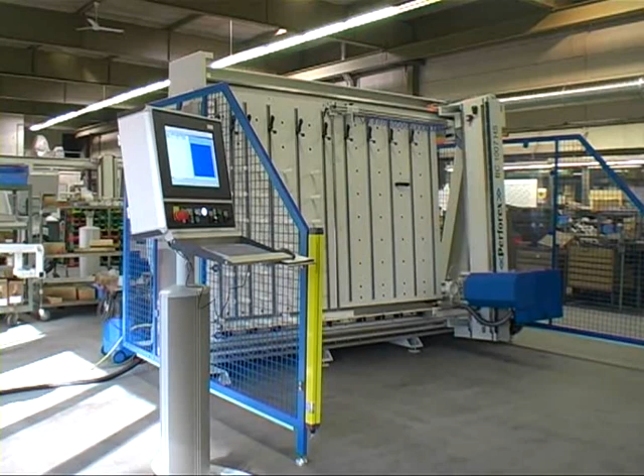Perforex is an up-to-date 4-axis machining center with computer numerical control, designed and manufactured for the purpose of machining control panels, cubicles and enclosures in the switch cupboard industry and assembly. Besides the simple and easy workshop programming, connections to almost all electrical CAD planning tools have been established on the machine.

No matter if you use our predefined libraries or your own raw panels, component or variable component parts, programming is much faster than taking measurements or making designs. Everything has only to be defined once and can be repeated as often as necessary.

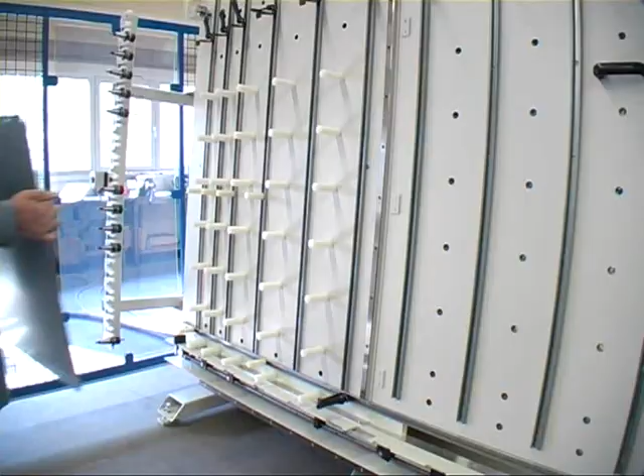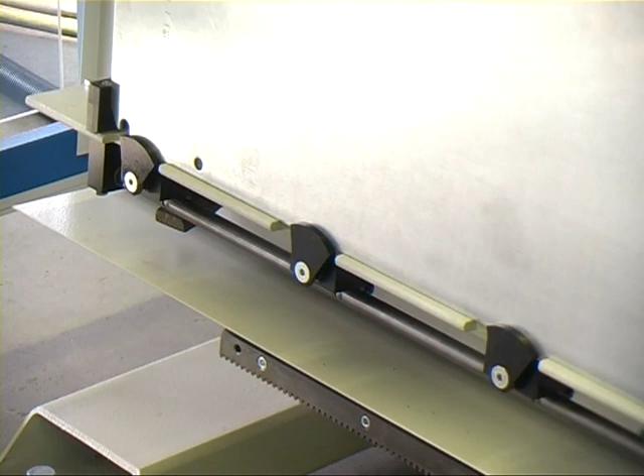Since the components to be machined are set on the machine from the front side, a setting up of the machine close to a wall or between other production sites will cause no problem at all. Once the panel is tightened, the machining can be started and completely finished without any further intervention.

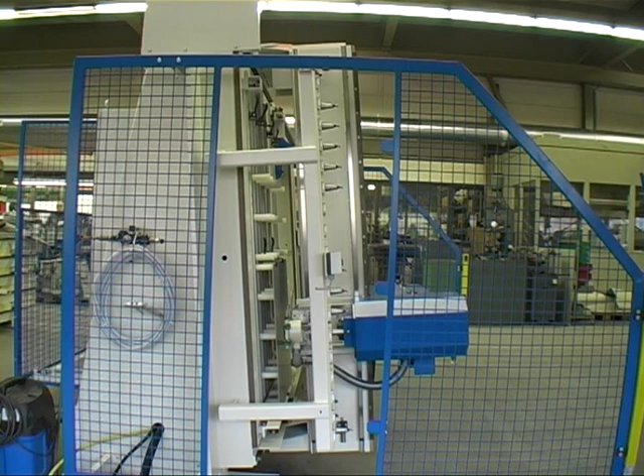Due to the vertical and slightly inclined work panel of the machining center, much less space is needed for the setting up than would be with horizontal work panels. The positioning of the workpieces can also be managed much more easily and in upright posture. The traveling bridge equipped with the corresponding tool slides over the workpiece, considerably reducing the working time for the job to be done.

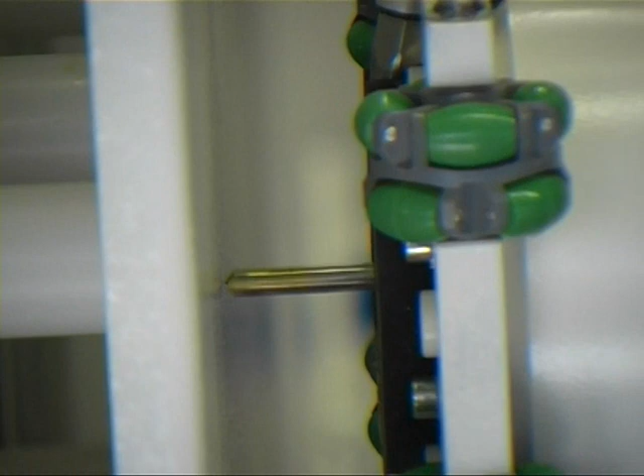The change of tools takes place automatically and each tool is checked before it returns to its place in the tool magazine. In the case of tool rupture, the machine will stop automatically and a warning will appear on the computer screen.

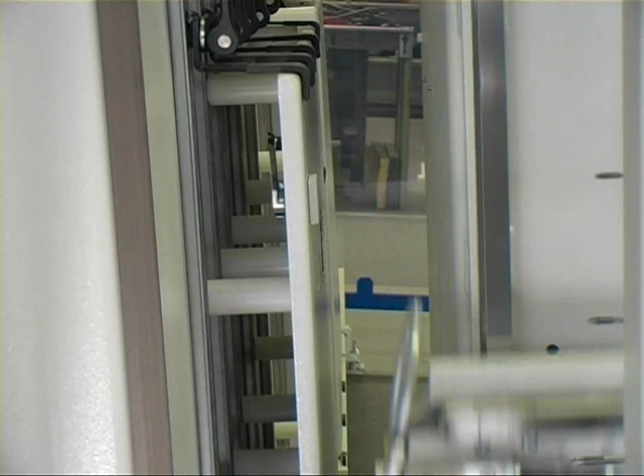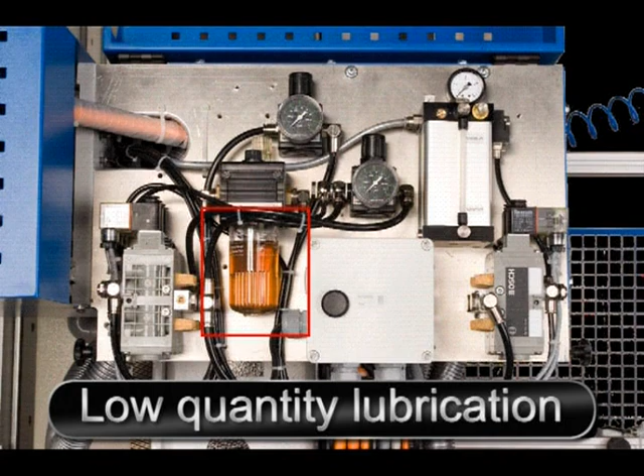The 5.5 kilowatt high capacity motor with maximum 18,000 revolutions per minute allows the machining of various materials, such as steel, stainless steel, aluminium, copper and even plastics. In spite of the high capacity, the motor works rather silently, just like the other axis motors. A low-quantity lubricating device provides lubrication and cooling for the tools. It works with a very fine oil spray mist right at the point where the machining is done.

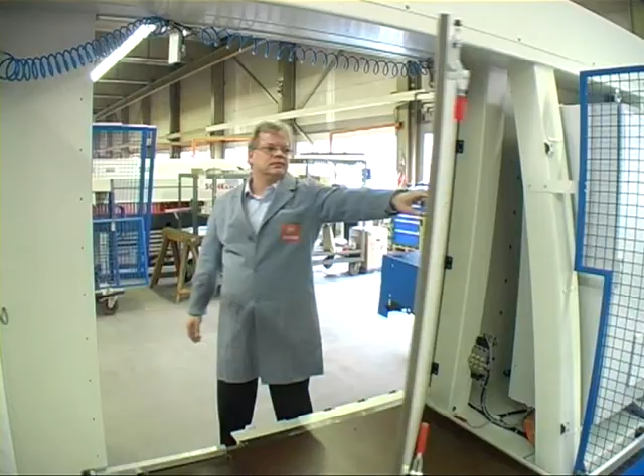The gate for the cubicle enclosure area can be easily opened from the front side. The Perforex machining centers are exclusively manufactured in Germany, and most of the components come from that country. A Perforex machining center is designed for long life performance.

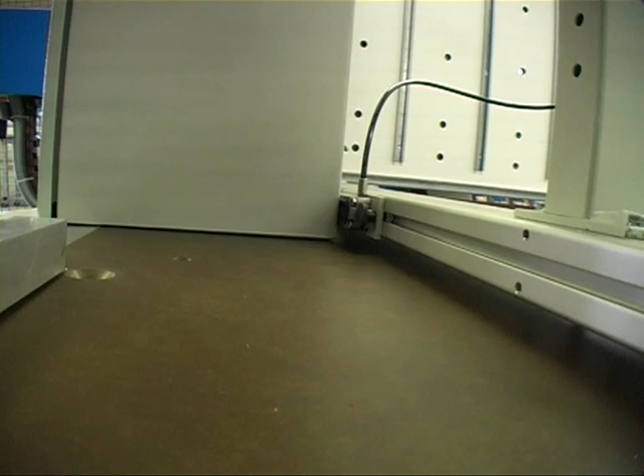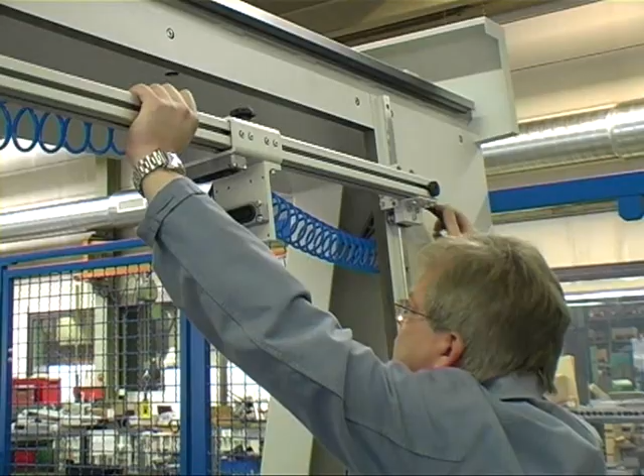Enclosures are placed into the gate and precisely put into the correct position with the help of the electromotorized depth adjustment. Then they are fixed with pneumatic clamps. Enclosures having a width up to 1200 mm allow the additional fixation of a panel at the same time.

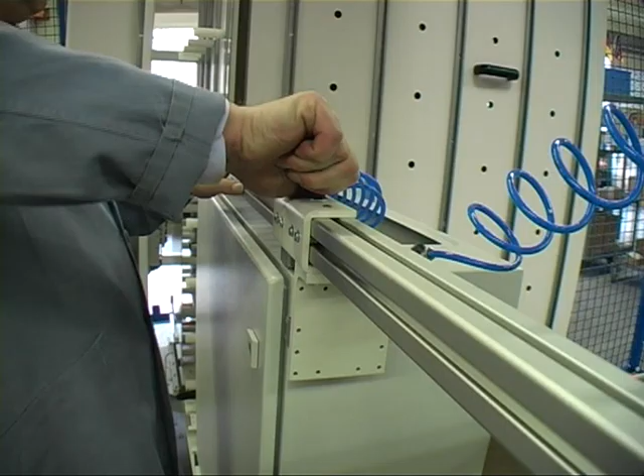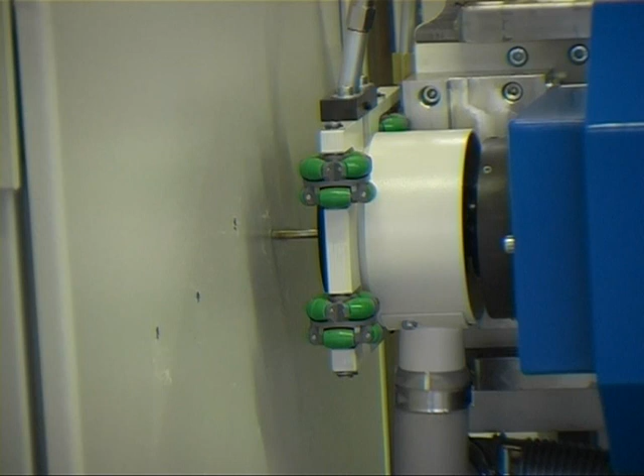Simultaneous machining of several cubicles can be carried out with the help of an additional multiple fastening device in the gate. This device allows the fixation of several small cubicles and their machining in one process. The use of customary trade tools and tool sockets makes it possible to optimize and to reduce production costs.

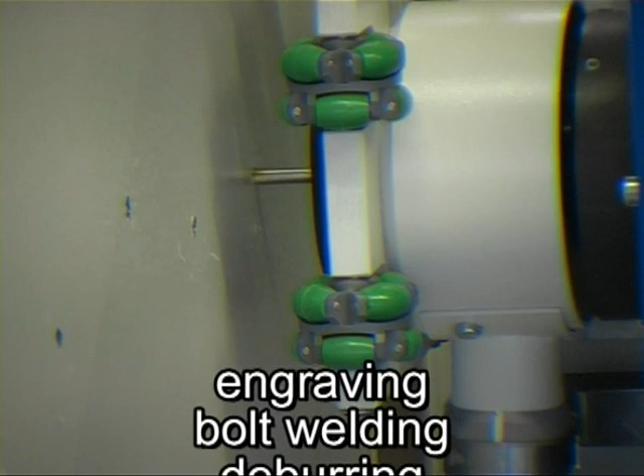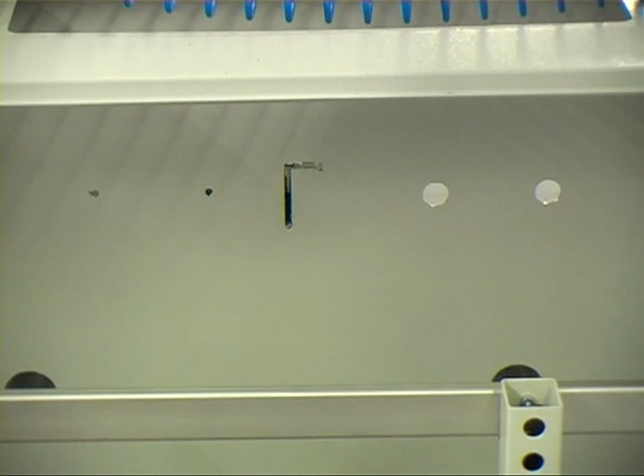Further machining processes such as engraving, bolt welding and deburring have been added to the original ones, like drilling, tapping and milling, allowing a complete spectrum in switch cupboard machining and assembly. Besides quality, flexibility and the large range of machining possibilities, cost efficiency and profitability are further topics which our customers benefit from when using the Perforex machining centers.

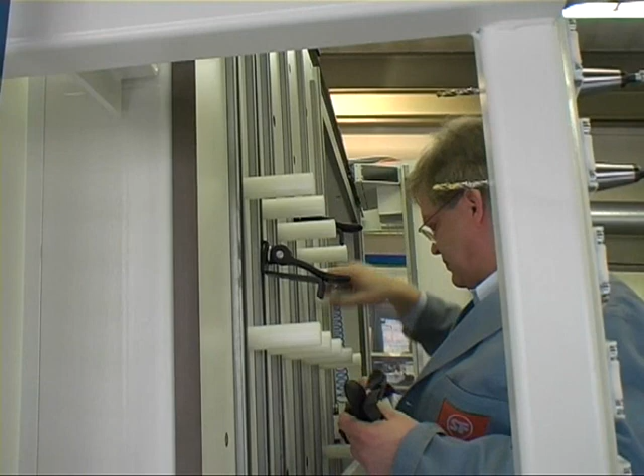The Perforex machining center is easy to handle, to maintain and to clean without the necessity of employing a special serviceman. Constant development on the machine has made it possible in the past and will continue to make it possible in the future to integrate further automated machining processes, optimizing at the same time the handling and the production processes.

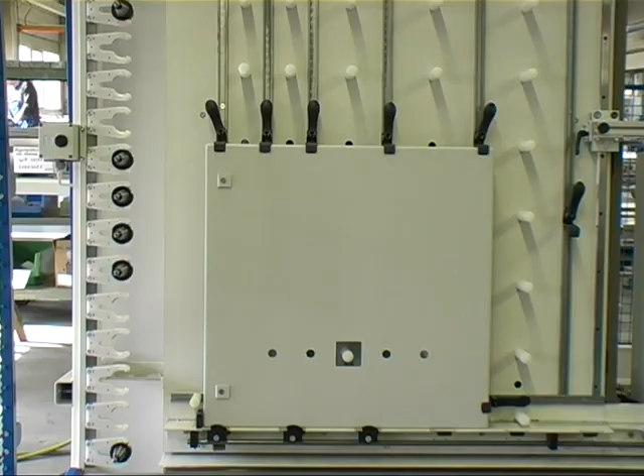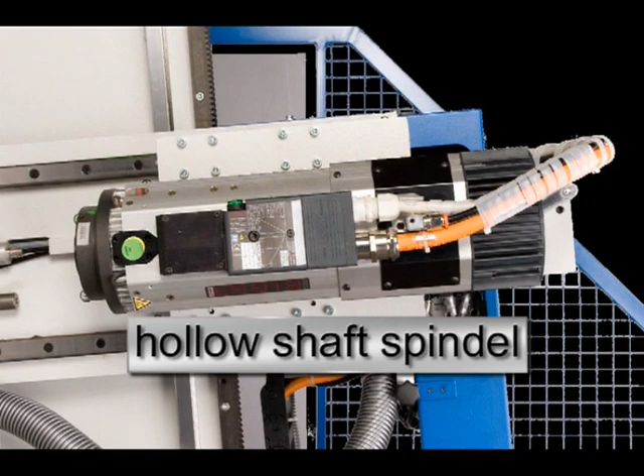Here are some details. The hollow shaft spindle right behind the drilling head, the enclosure, the patented pressure plate with integrated suction device for filings. Perforex machining centers are equipped with a 3-beam light barrier to prevent the machine being approached during operation.

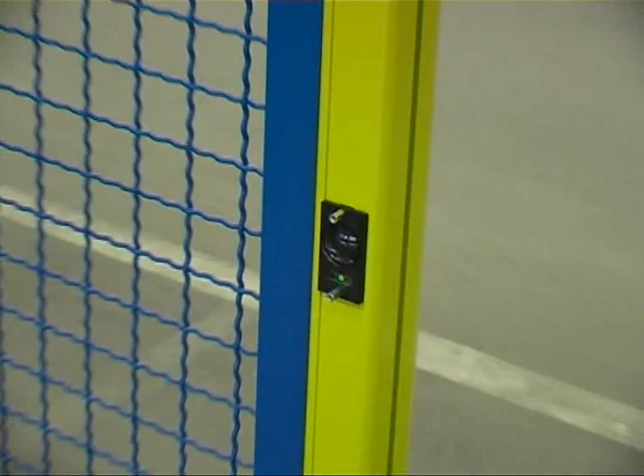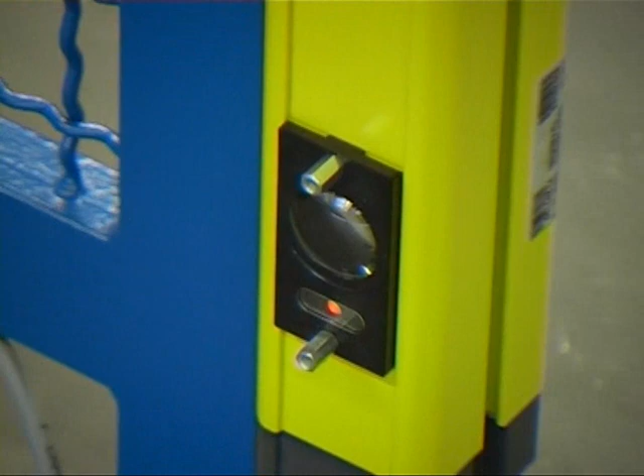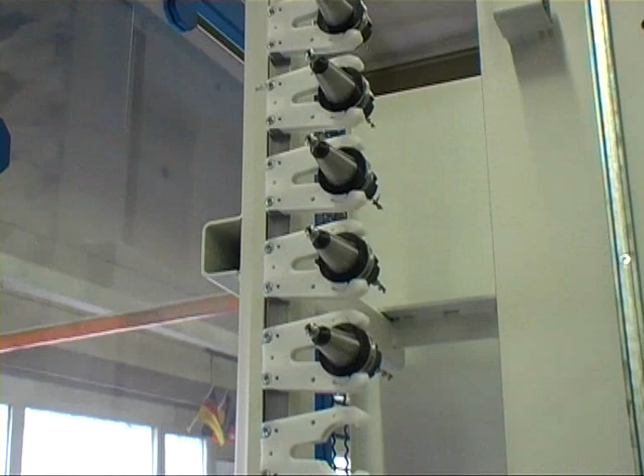The safety fences surround all working areas, even behind the machine. They are high enough so that even large persons cannot reach over them. The machining centers therefore correspond to all safety regulations established through the German MOT. Of course, the machining centers are in compliance with all applicable CE standards.

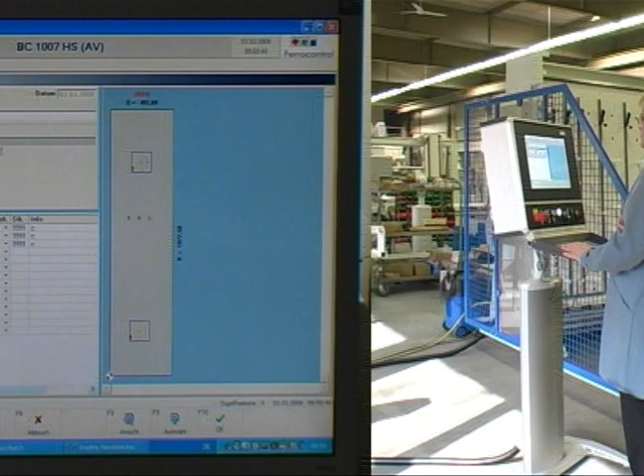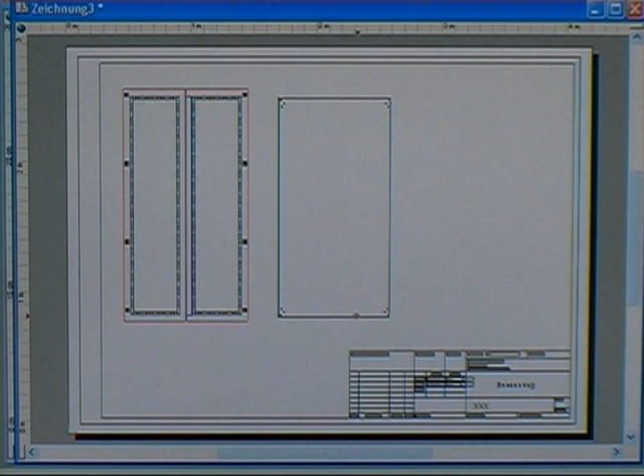One major aspect is and remains the workshop programming. This can be employed at any network-connected working site and uses a central data bank. The PC on the machine also has a network connection and uses the same data bank. With this, time-consuming import procedures have become void. No matter where the programming is done, the job order is on the machine and immediately ready for function.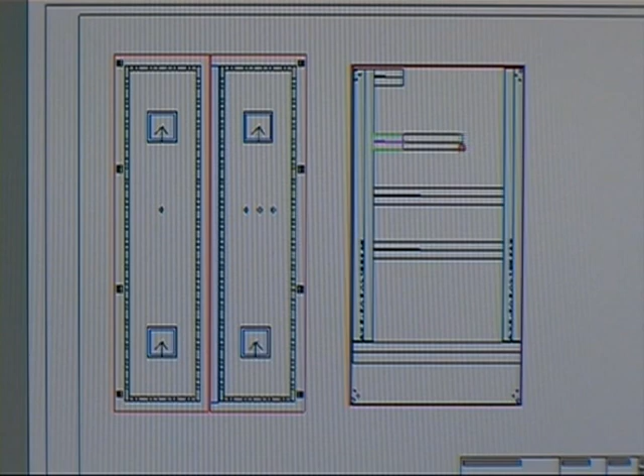You are already working with a CAD system? So much the better. In this case, you simply transmit the planning to our interface and the established bore pattern is immediately available for the next working order. We would be pleased to inform you whether your system is amongst these or not.

With the delivery of the first Perforex machining center in 1999, Kiesling Maschinentechnik has started a new age in the switch cupboard industry and assembly.